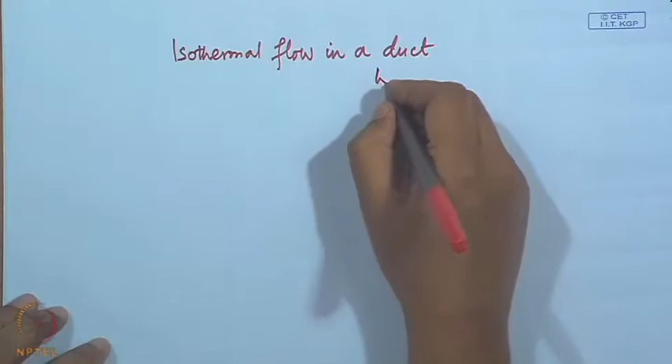So if we use these equations in a duct with friction, the duct is of course of uniform cross sectional area, so that A does not appear in the equations. So T is constant in this case, but T0 is not.

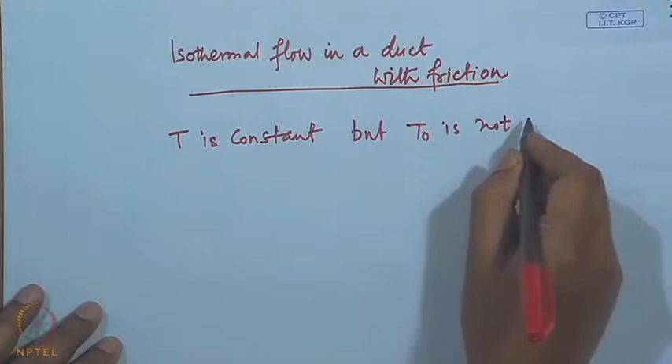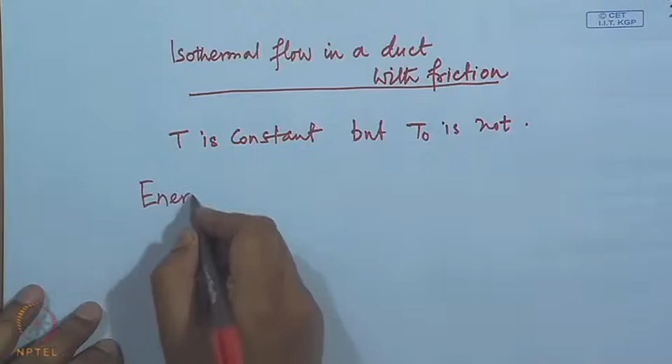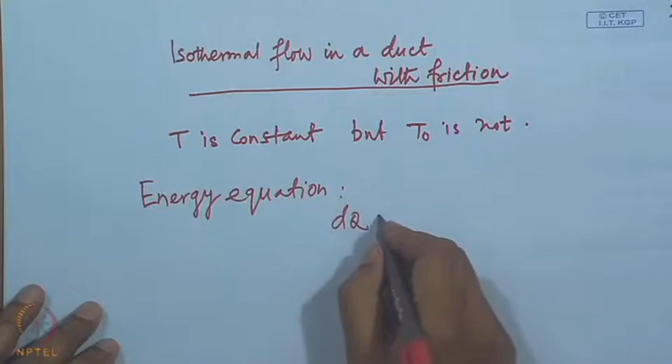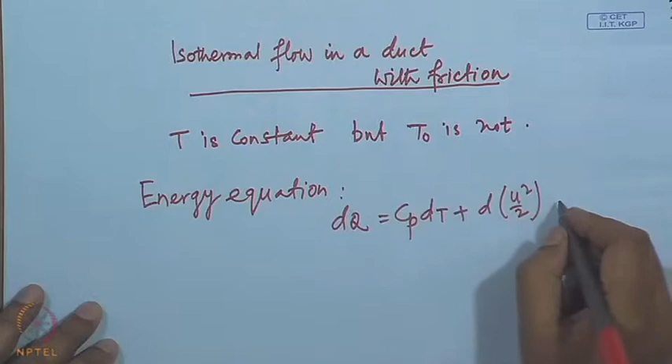Now, in this case the energy equation takes the form dq equal to Cp dT plus d(u square)/2, that equal to Cp dT0.

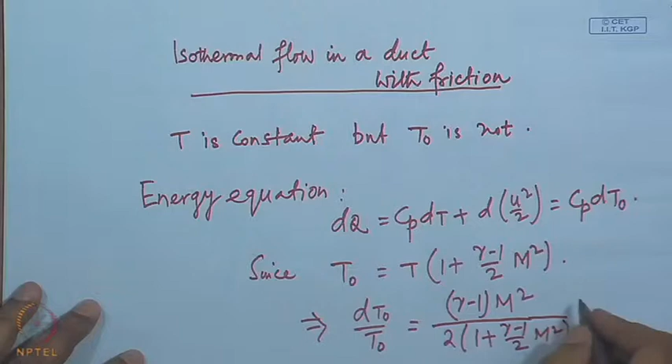Since by definition T0 is T into 1 plus (gamma minus 1)/2 m square, this implies dT0 by T0 equal to (gamma minus 1) m square by 2, into 1 plus (gamma minus 1)/2 m square, into dm square by m square. We will denote this as equation number 2, and this as equation number 1.

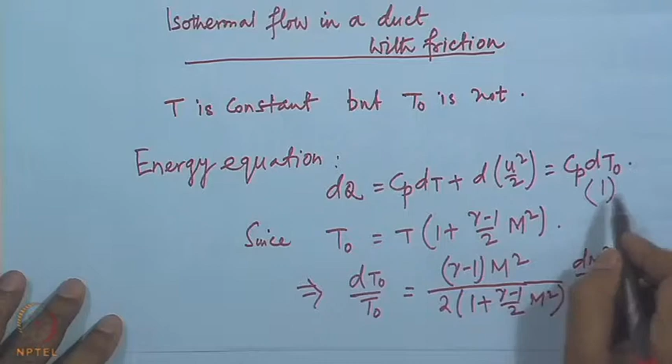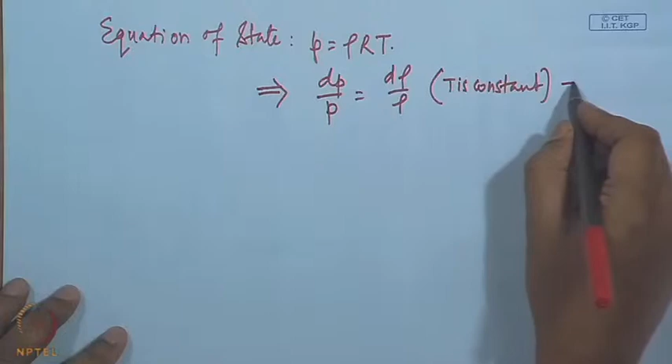So the equation of state for a perfect gas, that is P equal to rho R T for a perfect gas, and this implies dP by P equal to d rho by rho, since T is constant. We denote this by equation 3.

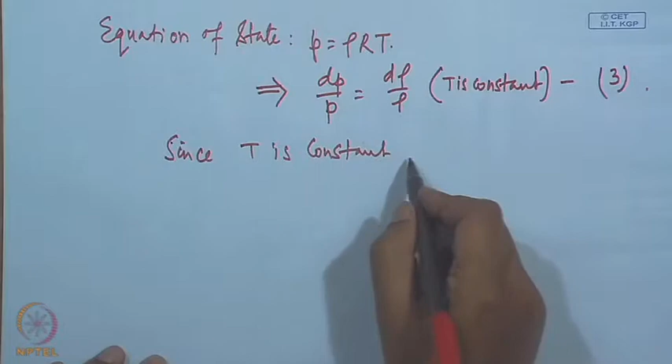And since T is constant, the speed of sound a is constant.

And m square equal to u square by a square, this gives dm square by m square equal to 2 du by u.

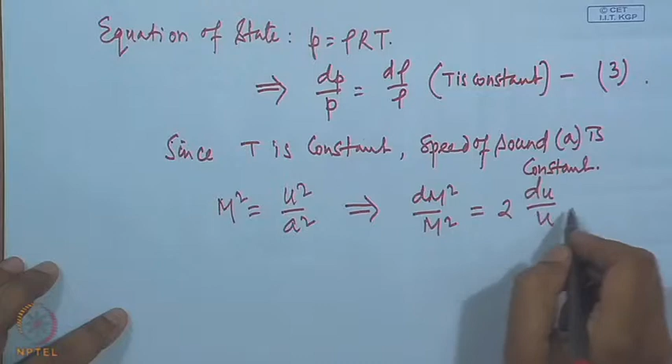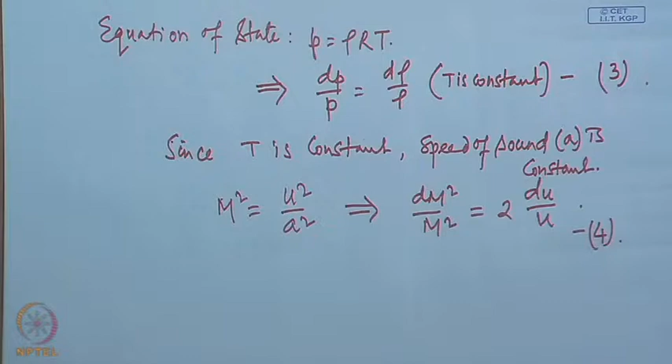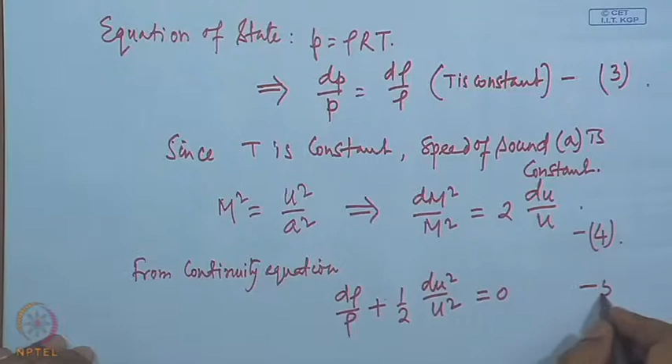The continuity, momentum and energy equations remain the same, and consequently from continuity, what we have obtained in the case of adiabatic flow, we get the same relation: d rho by rho plus half of d(u square) by u square equal to 0, and this we call equation number 5.

Similarly, from momentum conservation, we get the same equation that we had in the case of adiabatic flow with friction in a uniform area duct, namely dP by P, gamma m square by 2 into 4f dx by D, plus gamma m square by 2, d(u square) by u square equal to 0.

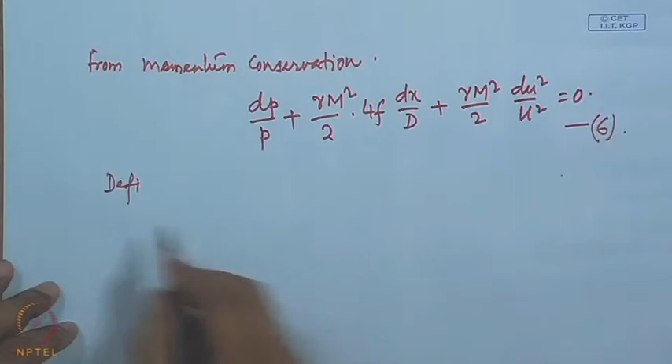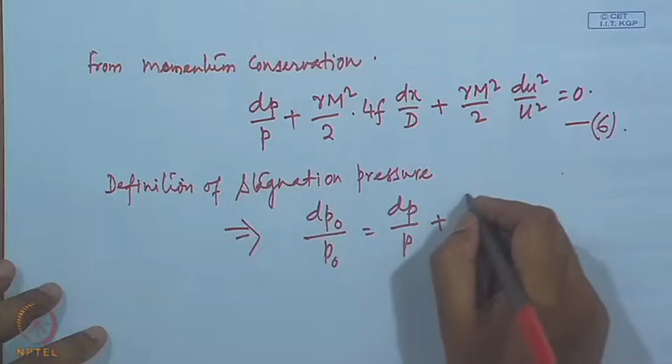And from the definition of stagnation pressure, this will be our equation 6. This gives us, as before, dP0 by P0 equal to dP by P plus gamma m square by 2, divided by 1 plus (gamma minus 1)/2 m square, into dm square by m square.

We can write again another equation for the impulse function. However, the impulse function is not very important for this problem, and consequently we are not going to use the impulse function.

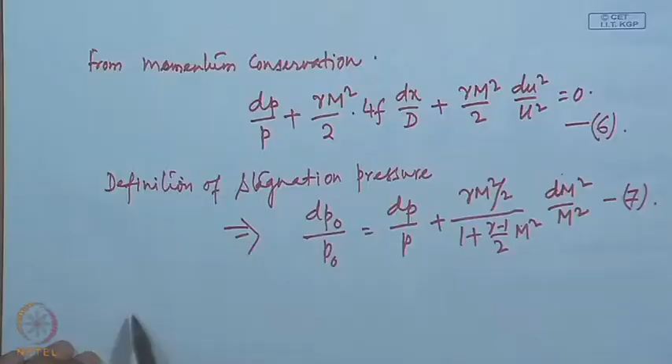So hence we have here once again six equations, that is from equation 2, 3, 4, 5, 6 and 7, with seven unknowns. And once again we choose these six equations, equation 2 to equation 7, with seven unknowns, and we once again choose 4f dx by D as the independent one.

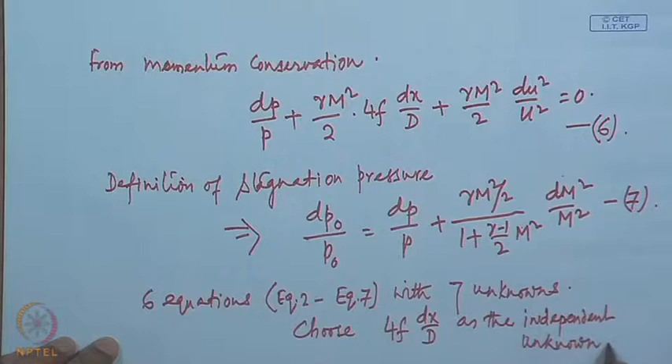Now, solving these 6 algebraic equations, that is equation 2 to equation 7, what we get is: dp by p is d rho by rho equal to minus d u by u, that is minus half d m square by m square. This is equal to minus gamma m square by 2 into 1 minus gamma m square into 4f dx by d.

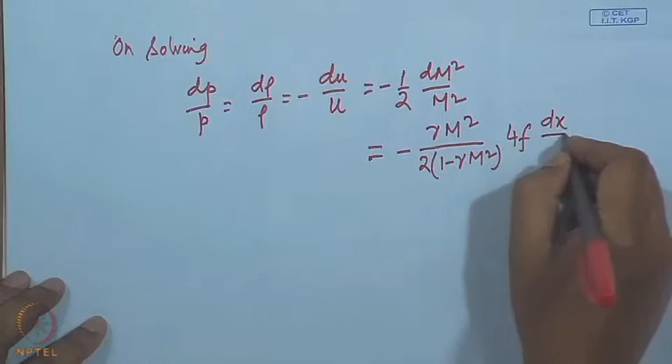We also have dP0 by P0 equal to gamma m square into 1 minus gamma plus 1 by 2 m square, by 2 into gamma m square minus 1 into 1 plus gamma minus 1 by 2 m square into 4f dx by d, and

dT0 by T0 equal to gamma into gamma minus 1, m to the power 4 by 2 into 1 minus gamma m square into 1 plus gamma minus 1 by 2 m square, 4f dx by d.

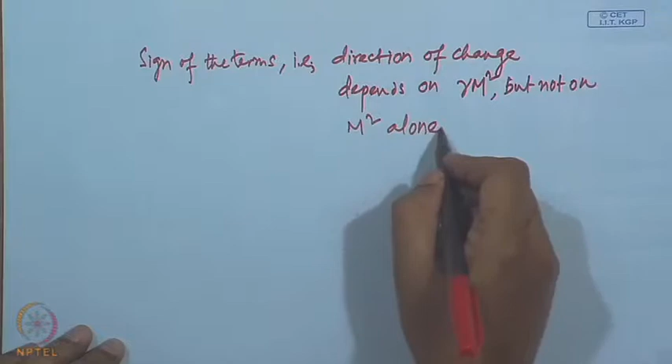Now, 4f dx by d is positive always. Hence, we can see that the pressure will decrease if m square is less than 1 by gamma. However, it will increase if m square is greater than 1 by gamma.

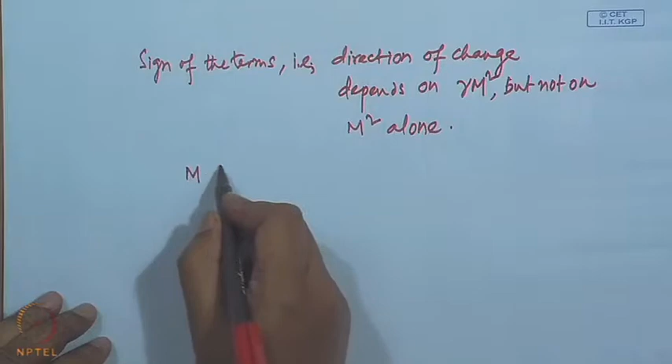Similarly, the sign of the other parameters, that is density change, velocity change, change in Mach number, change in total pressure and total temperature, will depend on whether m square is greater than or less than 1 by gamma. So, we can summarize this: if m is less than 1 by root gamma, the flow is subsonic, and the other case is m greater than 1 by root gamma. In this case, it might be subsonic or supersonic both.

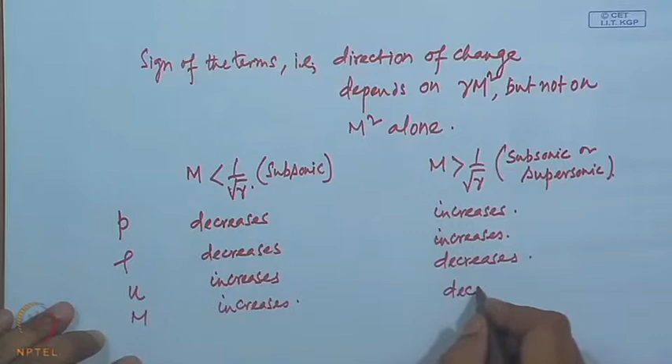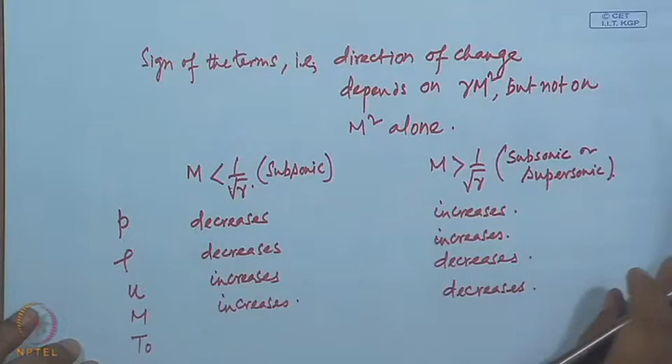What we see is that if m is less than 1 by root gamma, pressure decreases, while in the other case pressure increases. The density too decreases and increases in this case. U increases, in this case it decreases. M increases up to 1 by root gamma, and in this case decreases up to 1 by root gamma. T0 increases, in this case it decreases. P0 decreases.

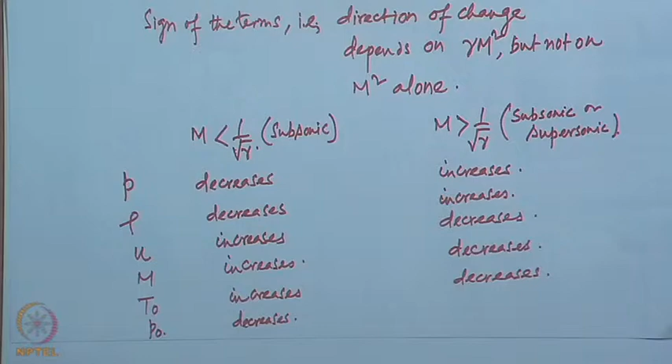However, coming to P0, we see another situation: when m square is greater than 1 by gamma, that is when this is positive, there is a possibility that this term can still be negative, giving this sign to be negative, that is P0 may decrease. However, there is also the possibility that this term may be positive when m square is greater than 1 by gamma. The numerator is of course positive, the denominator can also be positive for certain values of m, giving dP0 by P0 as positive, meaning that the stagnation pressure may increase for some specific value of Mach number, which we can see

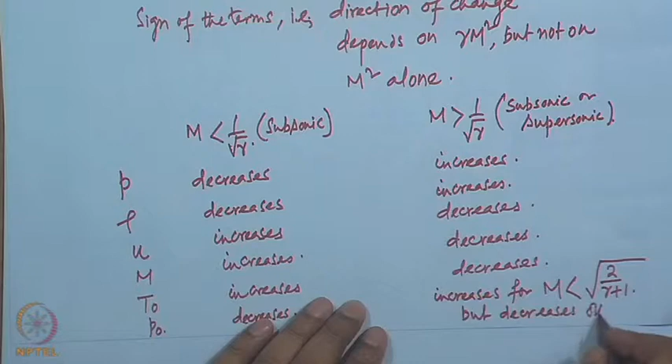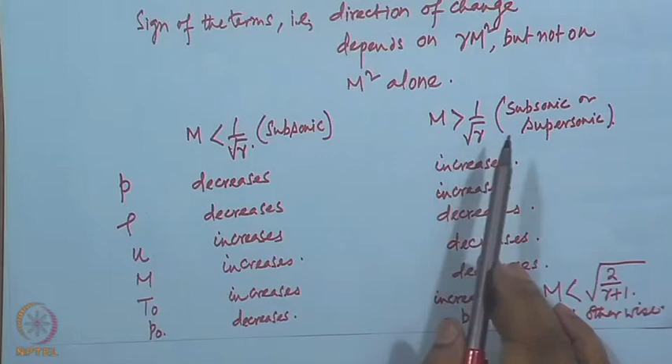that it increases for m less than square root of 2 by gamma plus 1, but decreases otherwise. That is, for Mach number greater than 1 by root gamma, but less than square root of 2 by gamma plus 1, the stagnation pressure increases. However, when Mach number is greater than square root of 2 by gamma plus 1, stagnation pressure decreases.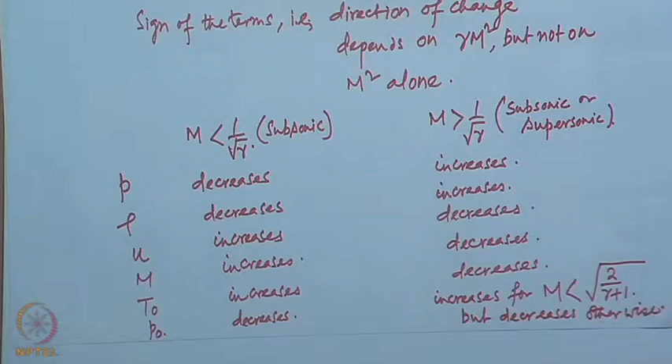What we find here is that the Mach number always tends towards 1 by root gamma. However, 1 by root gamma is essentially subsonic. So this implies that in this isothermal flow, the subsonic flow will always remain subsonic. However, the supersonic flow may come down to a subsonic flow with minimum Mach number of 1 by root gamma.

Also, we see that when Mach number is less than 1 by root gamma, heat is added to the flow stream if m is less than 1 by root gamma. Heat is rejected by the stream if m is greater than 1 by root gamma.

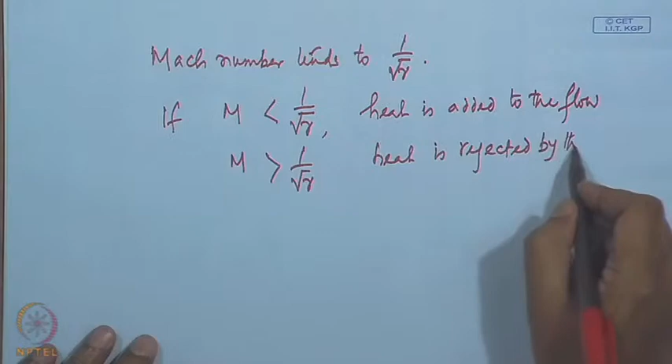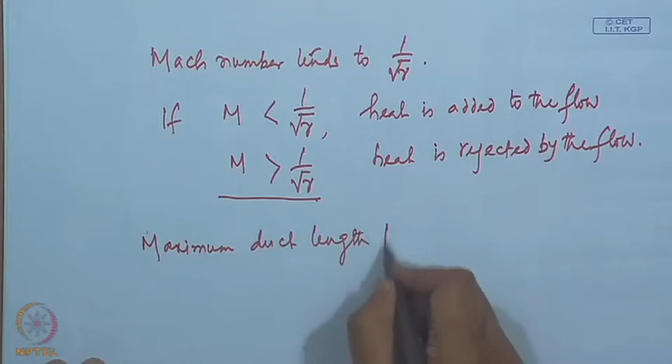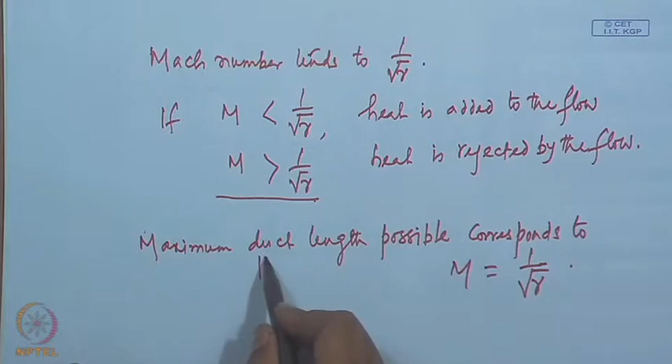Since the subsonic flow accelerates to the maximum value of Mach number 1 by root gamma, and supersonic flow decelerates to the minimum value of 1 by root gamma, this can be the maximum length of the duct possible, where flow Mach number reaches 1 by root gamma. So, the maximum duct length possible corresponds to this value of m, and if we denote this maximum duct length by L max, then once again we can integrate the relation from 0 to L max, and at 0 we consider

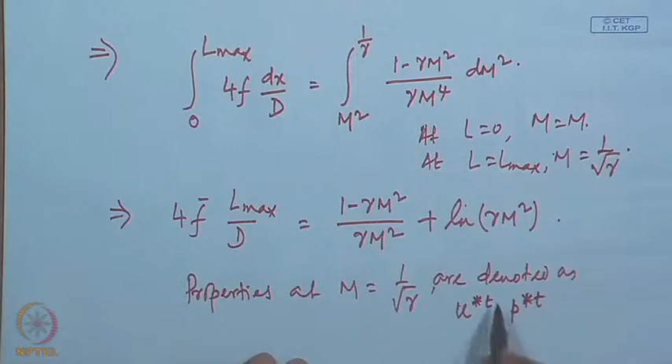Now, let us denote the properties at m equal to 1 by root gamma as u star, u star T, p star T, that is T to represent the isothermal case, so this is u star isothermal case and p star isothermal case, and rho star T and so on.

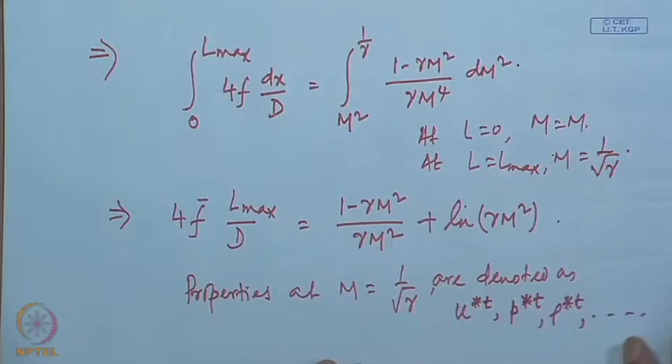Then, hence the parameter m square by u square can be written as 1 by gamma, and this is u star T square.

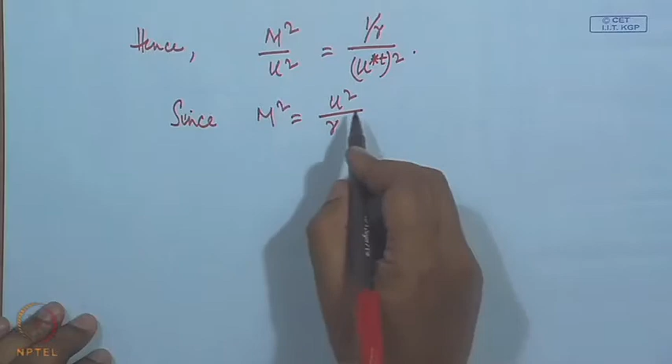Since we have M square equal to u square by gamma r t, and t is constant, this gives us u by u star t equal to root gamma into m.

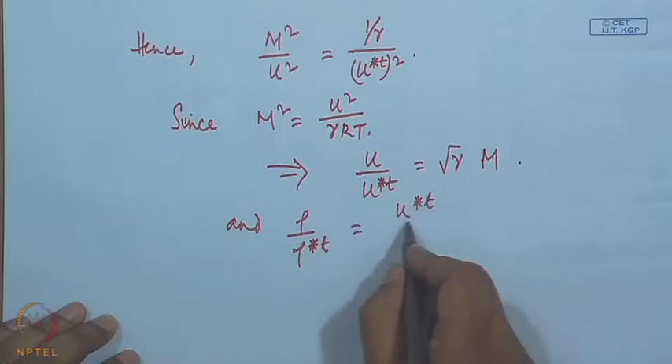And rho by rho star t, using continuity in a uniform duct, is 1 by root gamma m.

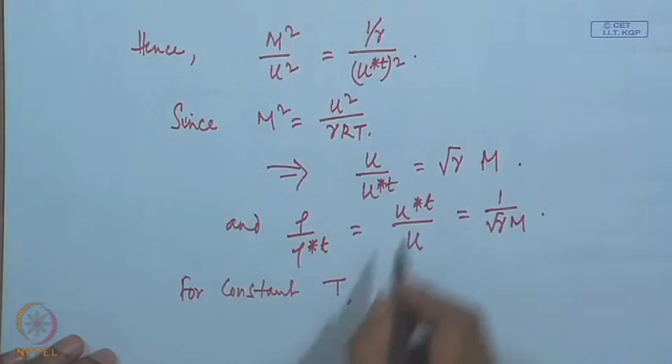Now, using perfect gas relationship, for constant T, we have P by P star T is same as rho by rho star T, which is also 1 by root gamma m.

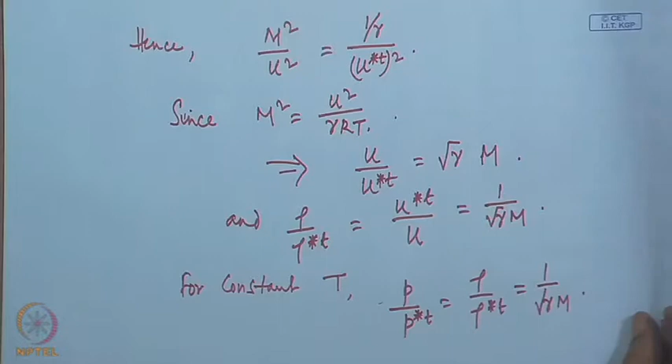Now, using the definition of stagnation pressure, we also have P0 by P0 star T equal to P by P star T into 1 plus gamma minus 1 by 2 m square to the power gamma by gamma minus 1, divided by 1 plus gamma minus 1 by 2 into 1 by gamma, to the power gamma by gamma minus 1.

And substituting the value for P by P star T, this becomes 1 by root gamma into 2 gamma by 3 gamma minus 1, to the power gamma by gamma minus 1, into 1 plus gamma minus 1 by 2 m square, to the power gamma by gamma minus 1, by m.

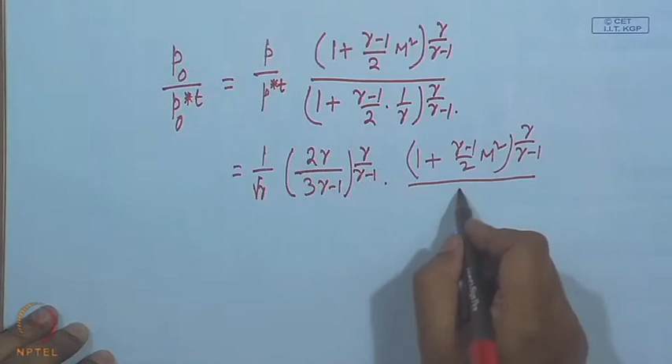The stagnation temperature accordingly can also be written as T0 by T0 star T is T by T star T, into 1 plus gamma minus 1 by 2 m square, divided by 1 plus gamma minus 1 by 2 into 1 by gamma, which is 2 gamma by 3 gamma minus 1 into 1 plus gamma minus 1 by 2 m square.

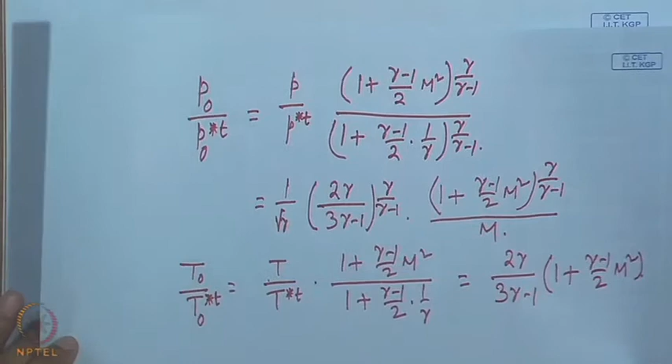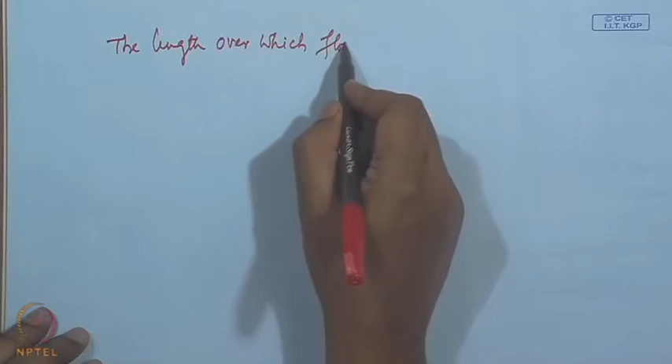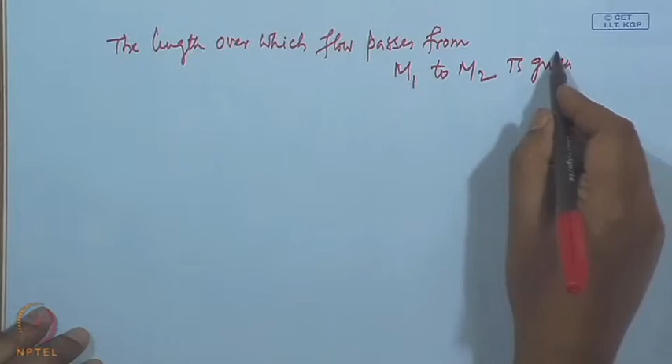The length over which flow passes from M1 to M2 is given by 4fL by D, or L, is this required length, is 4f.

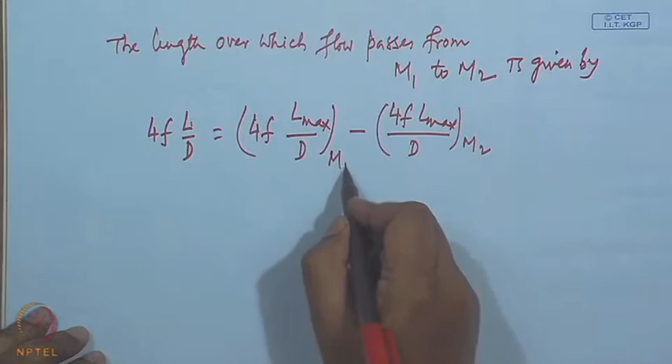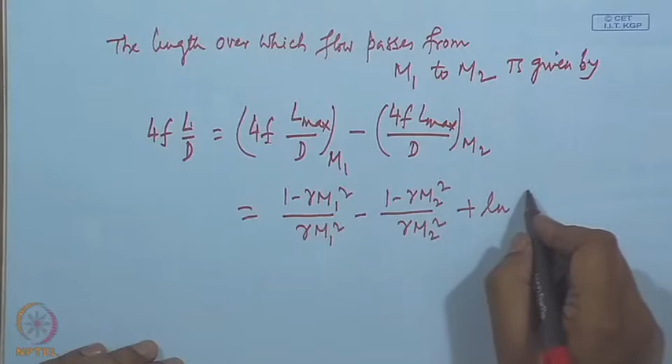M1 and M2, and using the relation that have been obtained for 4fLmax by D, we get 1 minus gamma M1 square by gamma M1 square minus 1, minus gamma M2 square by gamma M2 square, plus log of M1 square by M2 square.

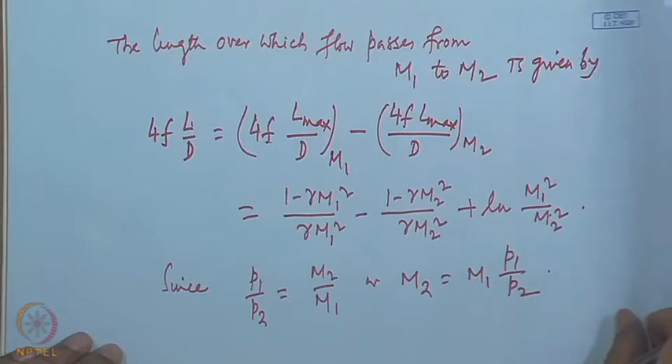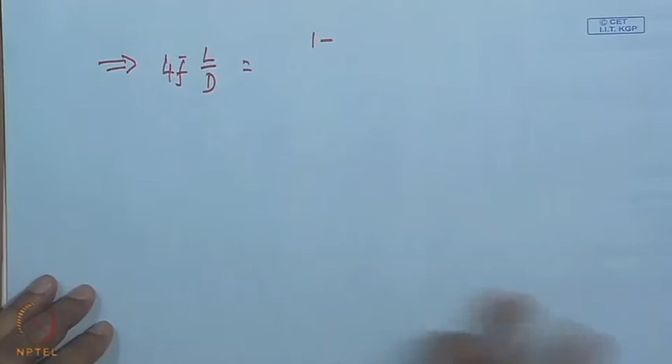We have already seen that P1 by P2 is same as M2 by M1, or M2 equal to M1 into P1 by P2. Substituting this relationship here, we get 4f bar L by D equals 1 minus P2 by P1 square by gamma M1 square, minus 2 log P1 by P2.

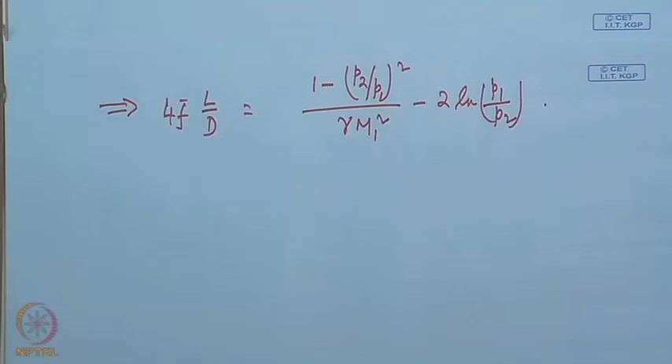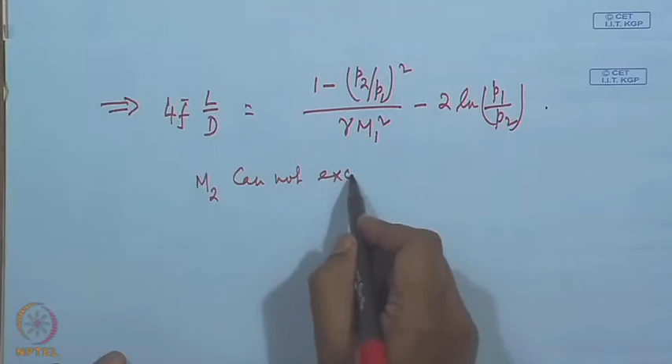Now, since M2 cannot exceed 1 by root gamma, this gives P2 by P1 square is greater than gamma M1 square.

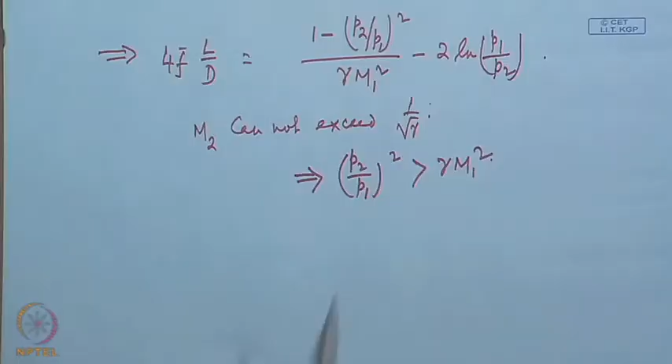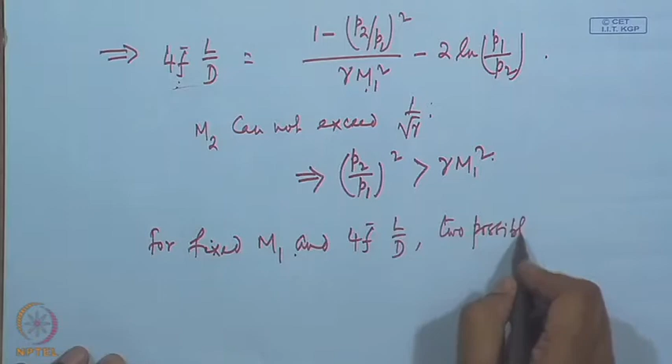Now, if you have a fixed value of M1 and also a fixed friction coefficient, then we have two solutions for P2 by P1. This relation clearly shows that for fixed M1 and 4fL by D, two possible solutions exist for P2 by P1. However, only one of them is acceptable, the other is not, because that violates the second law of thermodynamics.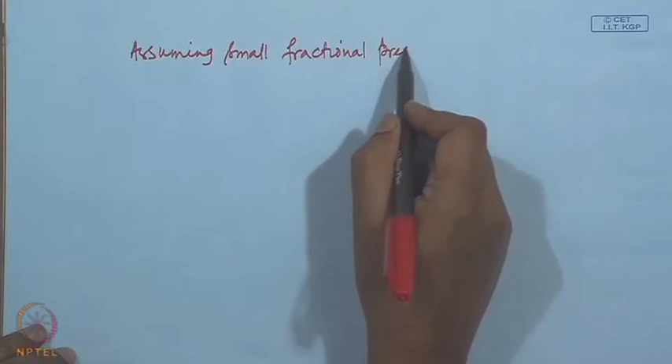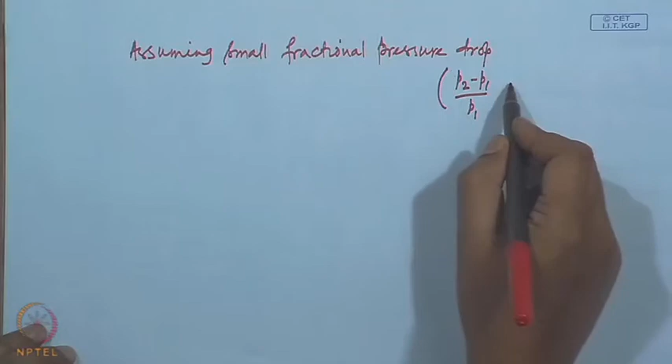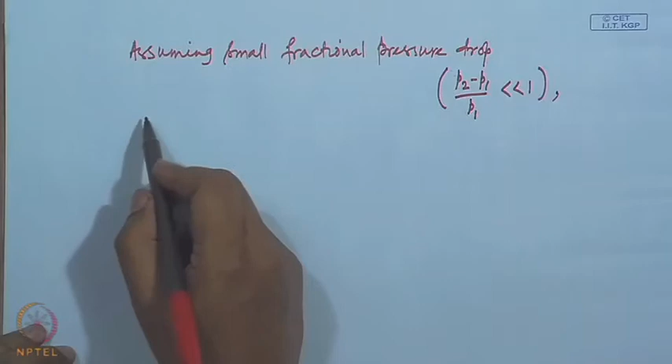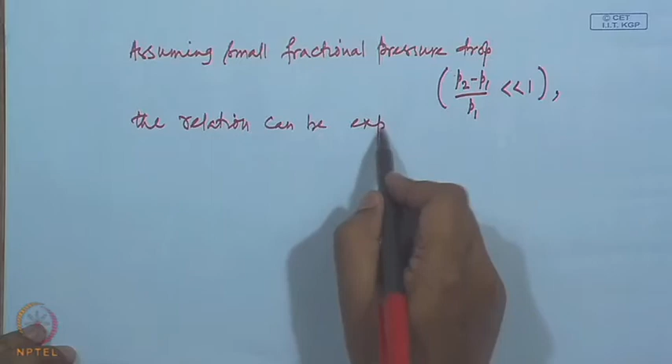If we consider a very small pressure drop, small in percentage, then we can expand this relation in a power series of this fractional pressure drop, assuming small fractional pressure drop, that is P2 minus P1 by P1.

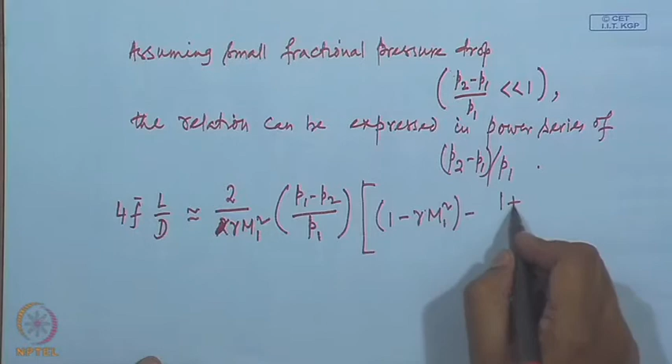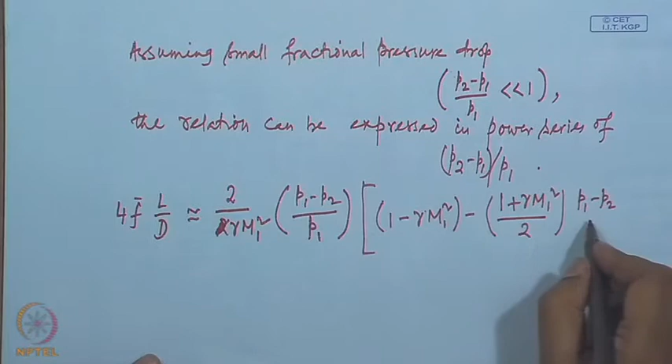This gives 4F bar L by D is 2 by gamma m1 square into P1 minus P2 by P1, into 1 minus gamma m1 square, minus 1 plus gamma m1 square by 2, into P1 minus P2 by P1, where higher order terms are neglected.

And we can see that this formula is similar to the conventional pressure drop formula in incompressible flow, where of course this term within the square bracket is just unity.

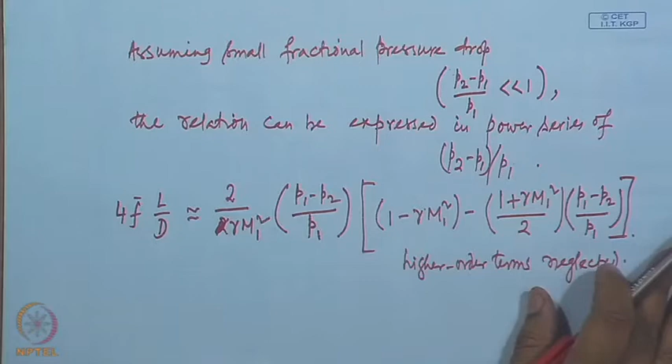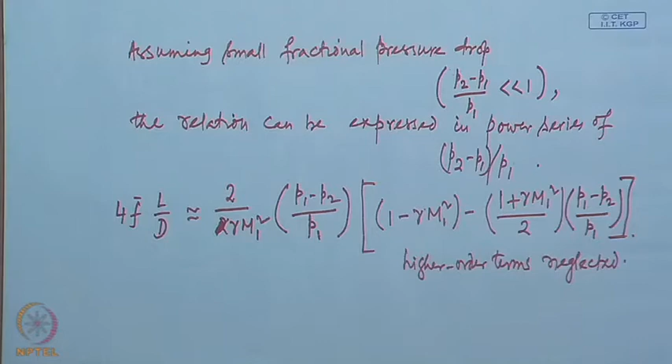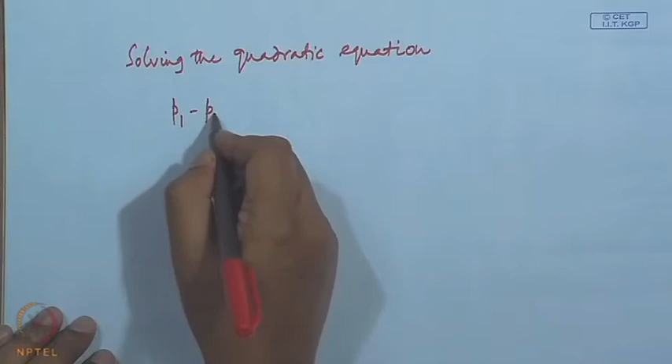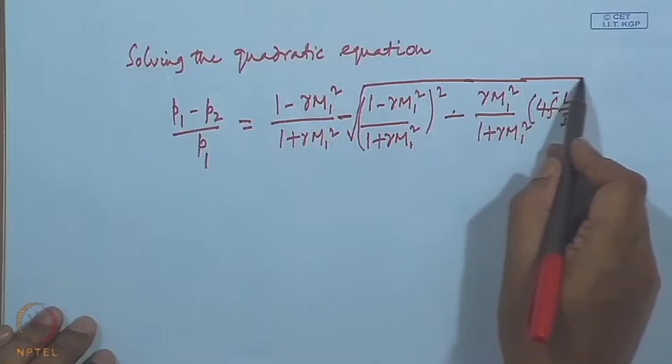Now, solving this quadratic equation, we see that in this solution the plus term is dropped, because that is not a physically acceptable solution, as it violates the second law of thermodynamics.

So, this gives the pressure drop over a portion of, or over a length of, the duct given by L, where the average friction factor is F bar, and this also is a measure of the power required to drive this flow through a duct of uniform area over a length L.

We have also seen that for a given value of m1, there is a maximum length for continuous isothermal flow, and at the end of that length the Mach number reaches 1 by root gamma. Hence, it follows that a choking effect may occur in similar fashion to those for adiabatic flow.

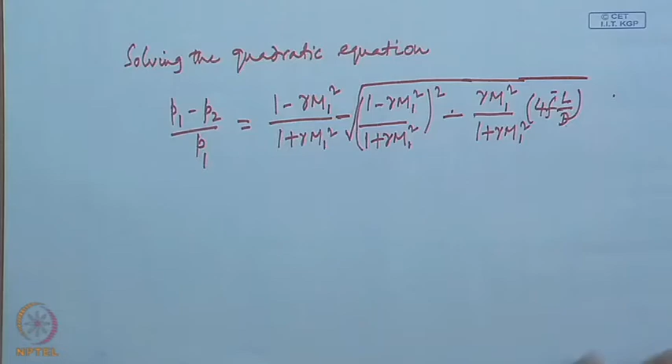However, one thing should be noticed very clearly: as the Mach number is very close to 1 by root gamma, the changes in all the parameters are very rapid. Looking back to the relations for dP by P or any of these, all these relations suggest that the change in the parameters is very fast when the Mach number is very close to 1 by root gamma.

Consequently, in that rapid change, the assumptions of approximately isothermal flow may not even hold. That is, when the flow reaches very close to M equal to 1 by root gamma, it is most likely that the flow will be nearly adiabatic instead of nearly isothermal.

However, looking from our simplified analysis of one dimensional isothermal flow, what we have seen is that for a long duct with uniform cross sectional area where friction is present, the flow reaches or tends toward a Mach number of 1 by root gamma, and

as you have seen here, if the flow is subsonic, the maximum Mach number it can reach is 1 by root gamma, that is the flow still remains subsonic in this case. However, in the supersonic case, the flow Mach number can come down to 1 by root gamma, which is subsonic.

That means a supersonic flow, when it flows isothermally in a long duct with uniform area and friction, can become subsonic.